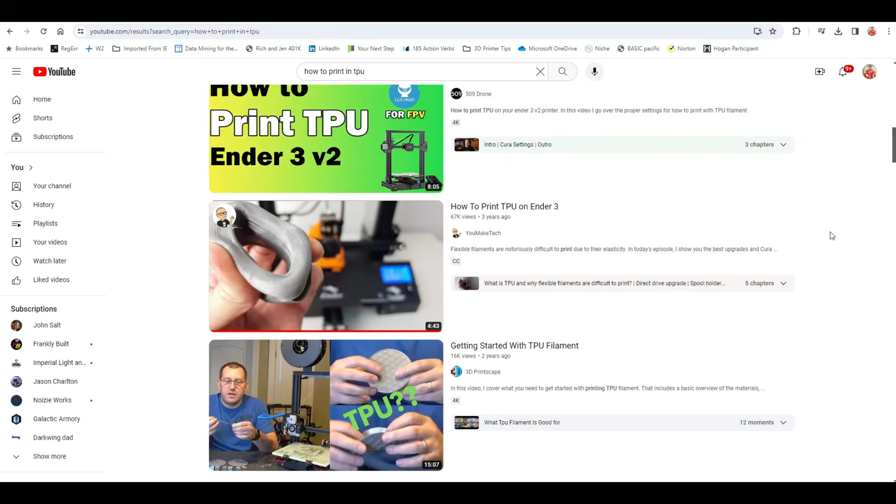Printing in TPU can be extremely easy, not that difficult. We'll get into the types of filament that you can use, but when you go out and research how to print TPU, you can get scared because there's a lot of information out there and it can be a bit overwhelming. For me, it just came down to four simple things. And we'll get into those four simple things and what they are.

But when you execute on those four principles and rules, your prints are going to come out amazing. And it really is not that difficult. So don't be afraid of printing in flexible filaments like flexible PLA and TPU.

I decided to go with Overture TPU. I just liked it. It had good ratings, but you know, filament out there is pretty consistent. You probably can find some garbage filament, that's not that hard. But Overture seems to produce a very good quality product.

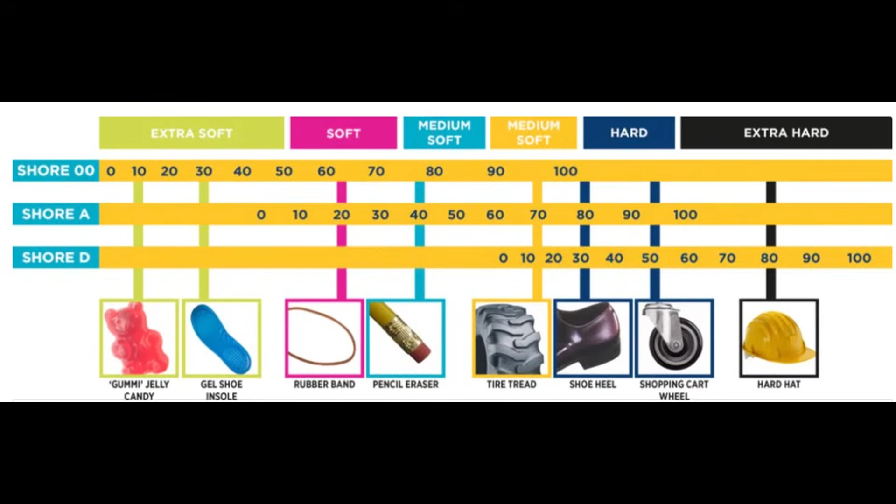So Overture TPU. What you want to look for in TPU is you want to make sure you get the right structural TPU. What I mean by that, and this is trick number one, is there is a measurement of TPU in terms of its flexibility, and it's called shore hardness. Shore hardness is a scale that simply tells you how soft or how hard the TPU material is. The TPU that I recommend printing in falls on that shore hardness scale of 95A.

95A is still very pliable. You can see that this bends really well. It's very soft. It's very stretchy, but it does have some stability and structure to it. The reason you want that is it will play extremely nicely in your direct drive system. So that's tip number two. Get a direct drive or have a printer with a direct drive on it.

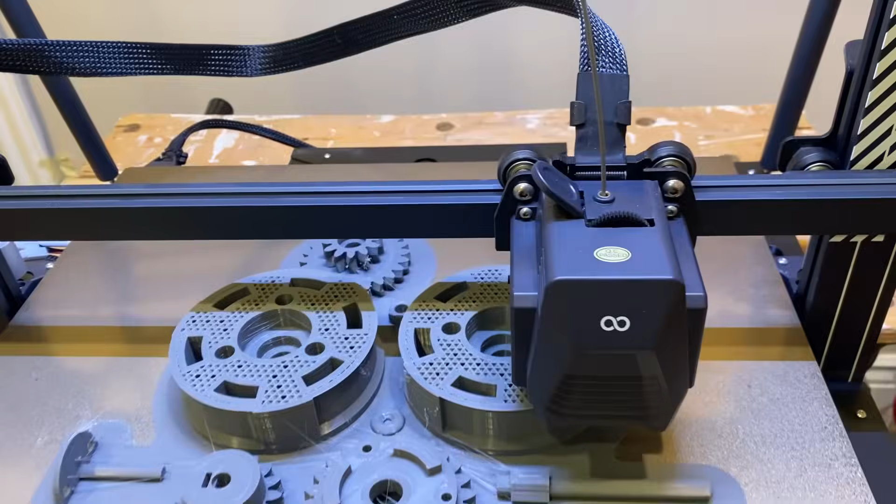So direct drive. Let me show you what that means and what that looks like. Here you can see on my Elegoo Neptune 3 Max, this is a direct drive system. The filament goes right from the spool into the drive. And that is a clear path without a Bowden tube where the filament can just freely enter into the hot end and extrude. If you come over here to my Creality CR10S, this is not a direct drive printer.

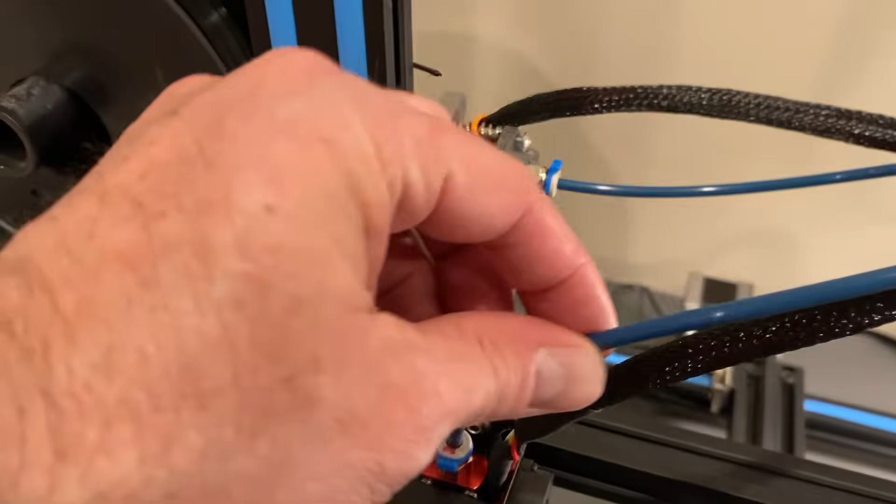So here you can see the Bowden tube, and it's being fed by the extruder, which is definitely not part of the hot end. And the filament, because it's so flexible, even the 95A more rigid filament, it will get bound up inside of this Bowden tube, and it is notorious for getting stuck right here where the filament gets fed by this extruder into the Bowden tube.

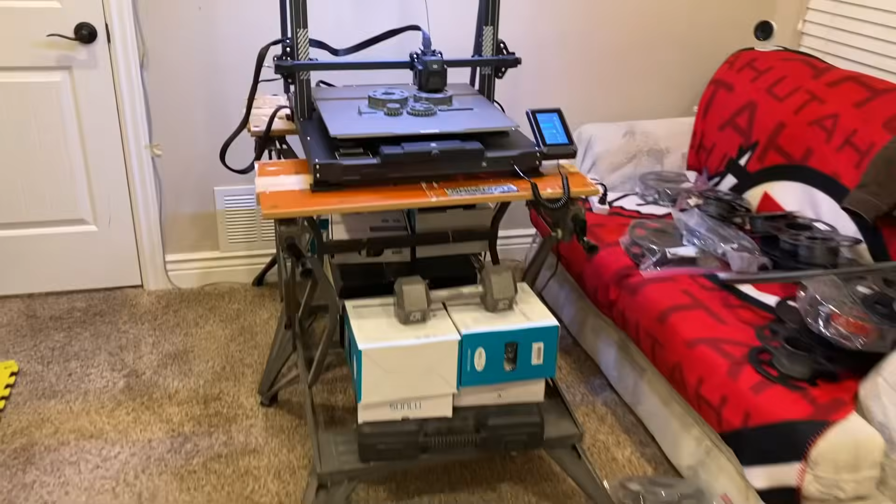The third tip, frog tape or painter's tape. You have to be careful with some of the magnetic beds on printers. The magnetic bed that comes with the Elegoo Neptune 3 Max has a texture to it. That texture allows for materials like PLA to stick, so you have good adhesion. With TPU, however, TPU will stick so well that it is going to be extremely difficult to get that TPU off of your print bed.

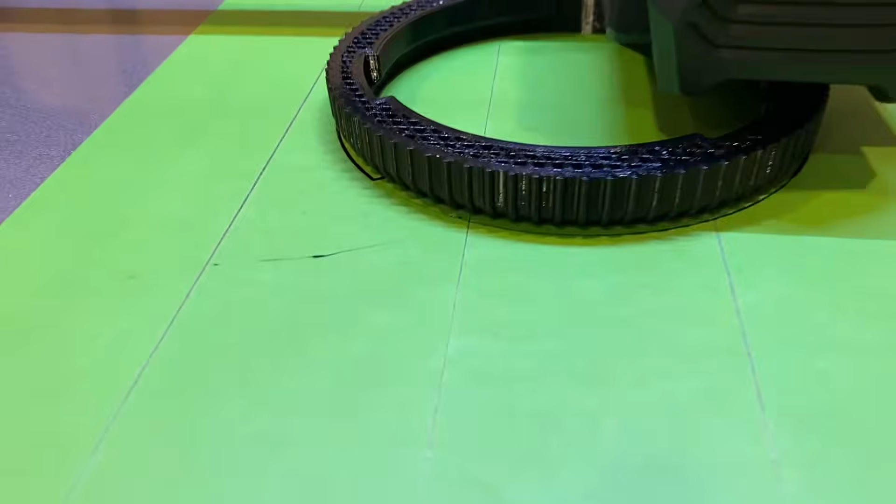So simply lay down frog tape on your print bed. It's not going to hurt it. It'll stick really well, and the TPU will print on top of the frog tape.

The fourth trick comes down to settings. And I'm not talking about complex settings. I'm talking about a few settings that you can go into your slicer and adjust in order to get the right performance for your TPU so your prints come out perfect every single time. Let's go take a look at those.

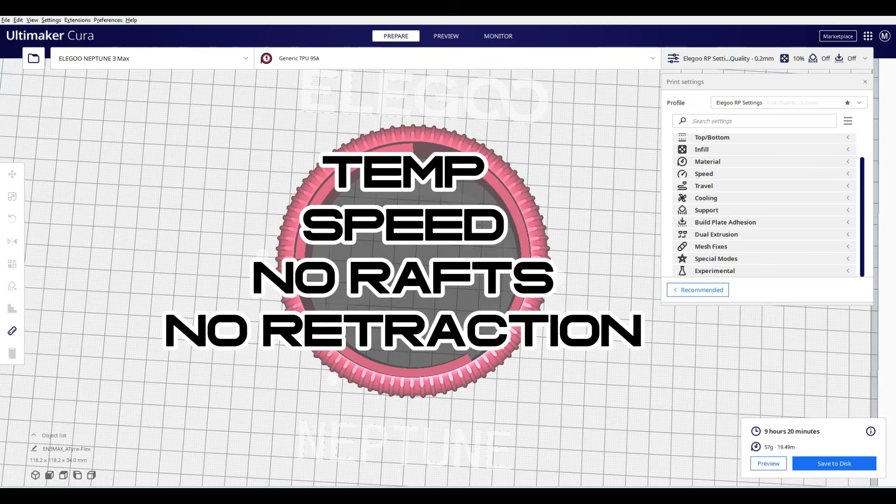So the fourth trick, settings in your slicer. Let's make this real simple. It's all about your temperature, your speed, your first layer and what that build plate adhesion should look like, and your retraction settings. So let's talk about temperature.

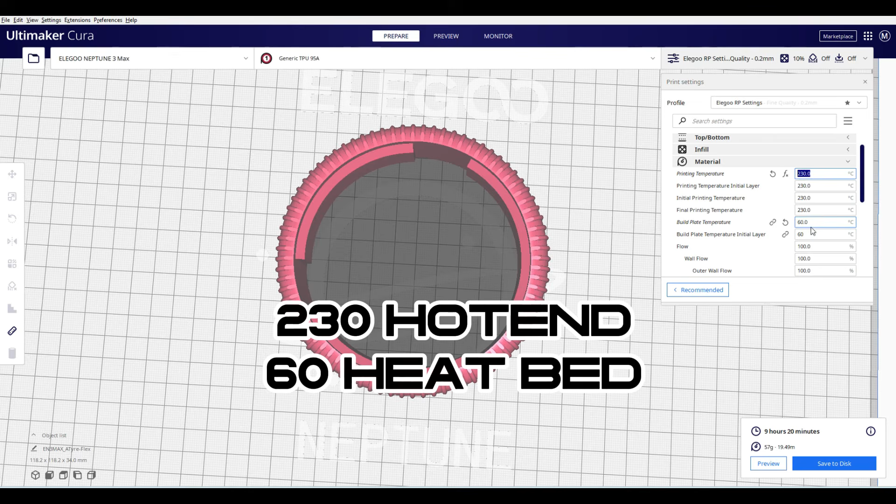For the filament that I am using, and for most filament that is TPU, it's recommended to print within that 215 to 230 range. I found that just going right to 230 degrees on the hot end worked perfectly, and 60 degrees on the build plate.

Remember, you have frog tape that is on the build plate. Putting your build plate at 60 degrees is just fine, and the filament will stick really nicely to that frog tape, and the extrusion, because of the hot end, will come out nice and smooth.

So let's go to speed. This one is critical. If you come into your slicer and you go to print speed and say, I'd like to print at 40 millimeters per second, you will notice that the other sections of that speed, whether it's infill, wall, top or bottom, initial layer, they change. You'll see that your infill speed is at 55, your wall speed's at 20, your outer wall speed's at 20, etc. Your overall average print speed might be 40, but you're not getting a consistent speed across the board.

Why is this important? Anytime you change the speed with TPU filament inside of your direct drive, it will start to get clogged. It will start to get caught. It will start to bind. How do you fix that? Simply force everything to a consistent speed across the board. Right here, 20 millimeters per second seems to be a really, really effective print speed for TPU.

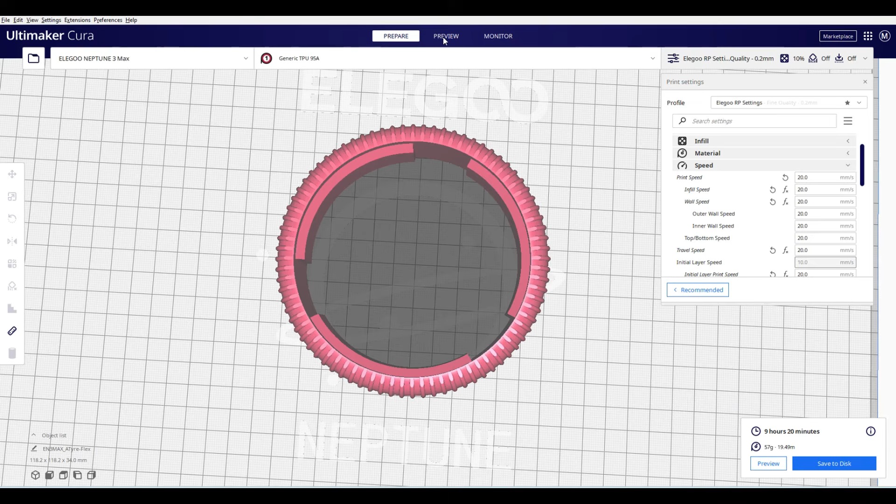How do I know that the print speed is going to be consistent through the entire print? Slice your model, come over to preview, and in this drop down box, which I just selected right here, you will have the option to choose speed. Here you will see all of the different processes that the print will go through. You want to ensure that across the board you have a consistent speed, 20 to 20.

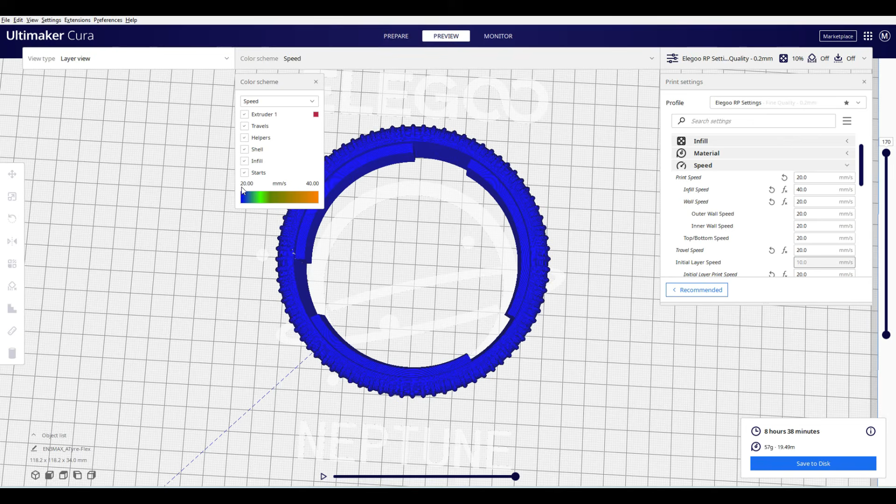If I were to change, let's just say, infill speed to 40 and left everything else at 20, if I reslice this model, you can now see that my max speed is 40 and my minimum speed is 20. If you want to know where that maximum speed comes from, you simply select or deselect those options and it will show you infill is set to 40.

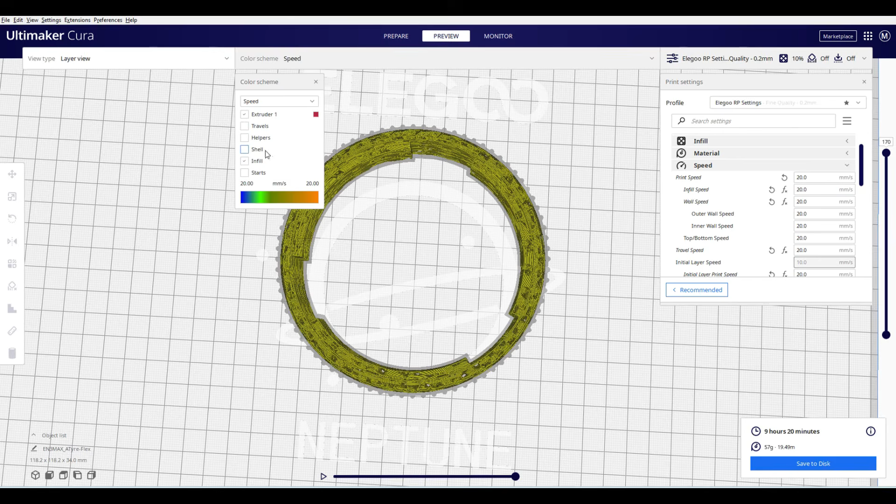So this helps you understand how to get everything consistent across the board, from infill to walls, everything. So I come back here and select everything. I can see that I have a consistent infill speed.

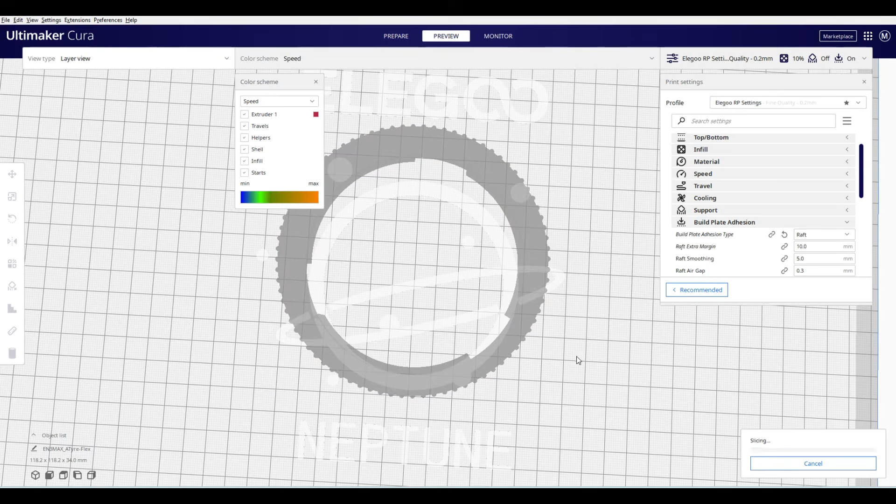So as far as the build plate adhesion, you do not want to do a raft. What I mean by raft is, I'll just slice this and show you. A raft is something that prints under your model that the model sticks to. Remember, our raft is the frog tape. So we don't have to do a raft.

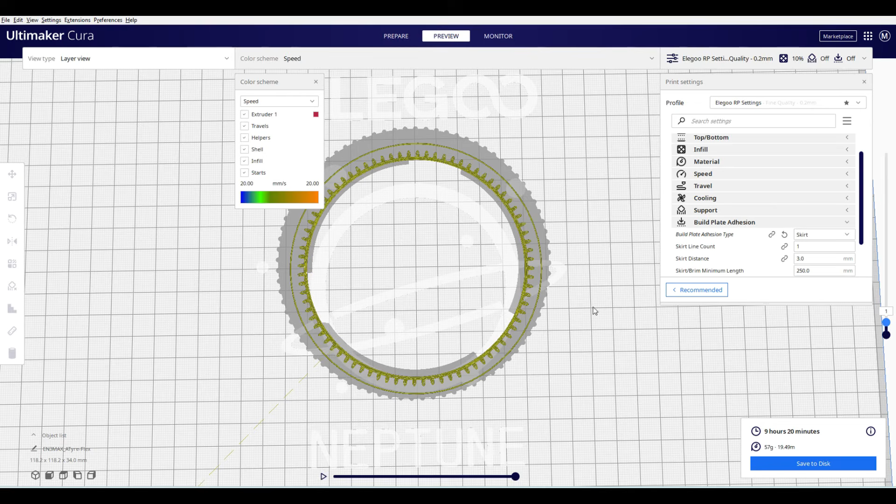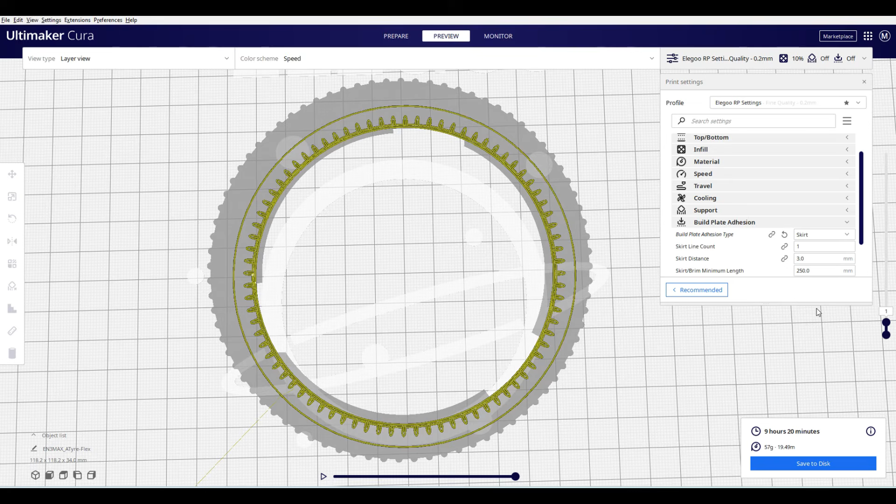If you want to do a skirt, which I'll show you what a skirt is, a skirt simply is a prime line. Let me get this out of the way. And you can see that prime line right on the outside of the model, right here, that thin yellow line. That prime line is just going to allow you to look at how the TPU is coming out, and if it's nice and flat, and if it's sticking to your frog tape. So really, you do not have to have any type of build plate adhesion in your model. It will stick to the frog tape nicely.

So the other thing that you want to look at is any retraction setting. If you have retraction enabled, turn it off. Retraction simply means that the drive will pull the TPU filament back inside so that it doesn't end up leaking as the hot end is traveling from one side of the model to the next. So that may cause some stringing. And a way to prevent some of the stringing is with an option called combing.

And let's just see here. Go back into my settings and come down here to combing mode. And if you change that to all, that means that your combing mode is going to essentially keep the nozzle in places where it is traveling along the printed areas, and it's not going from one side of the model all the way to the other side of the model to start printing again. That helps reduce the possibility of stringing.

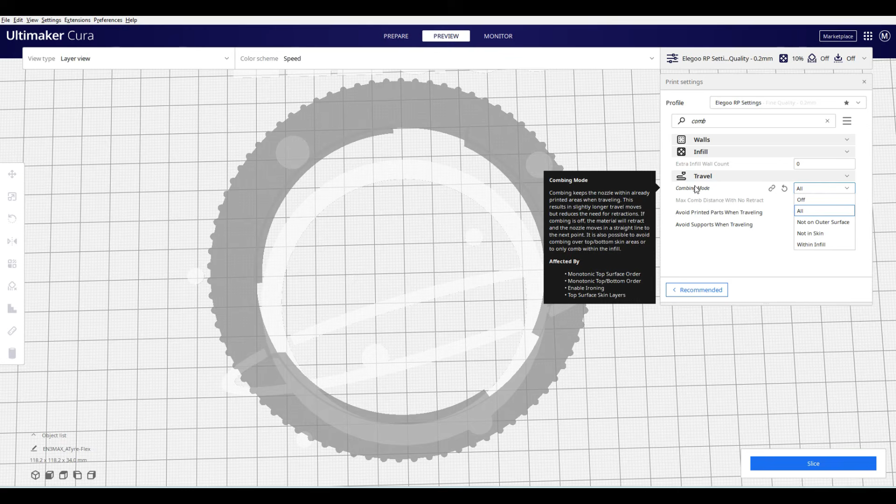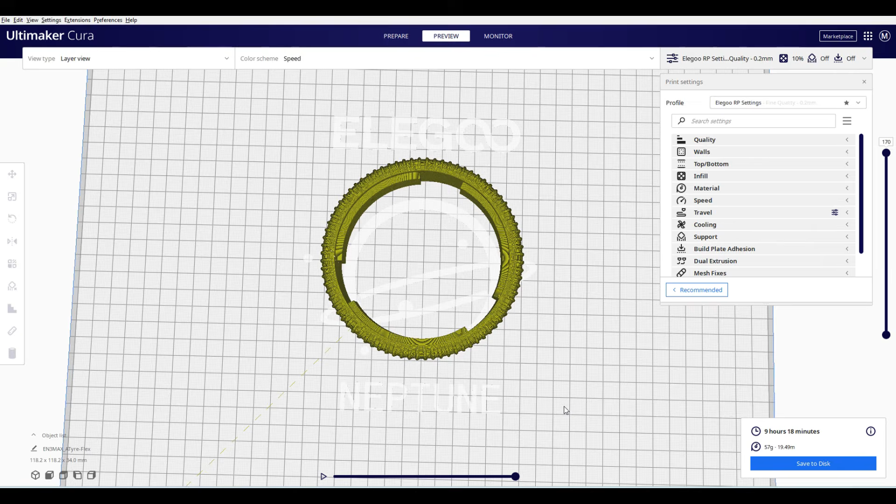You may get some stringing depending on the shape of your model, but for my model, this worked really nice when I had combing enabled and retraction disabled. So again, this little tire, it took 9 hours to print, but it was going really slow and it came out extremely smooth. So there you have it. 4 simple tips. 95A filament, direct drive printer, frog tape, a few minor settings on your printer.

Also, keep your filament, your TPU filament, wrapped. It will absorb moisture from the air very quickly, which creates bubbling and more stringing. But if you simply use a straw to ziplock the bag and then put the straw in to suck out the rest of the air, you'll have a nice airtight enclosed filament case for your TPU.

So that's it. Hope you found this helpful and that these tips and tricks are going to work for you.